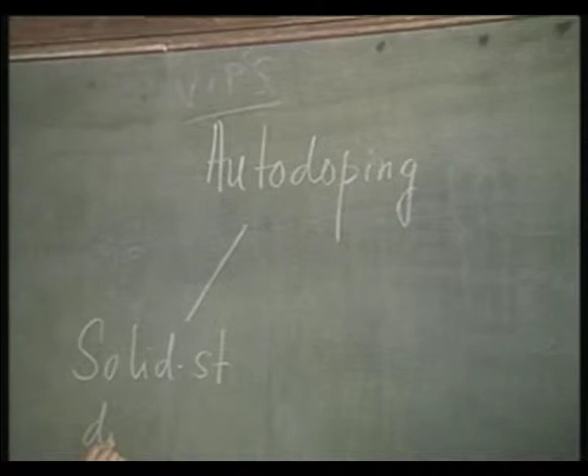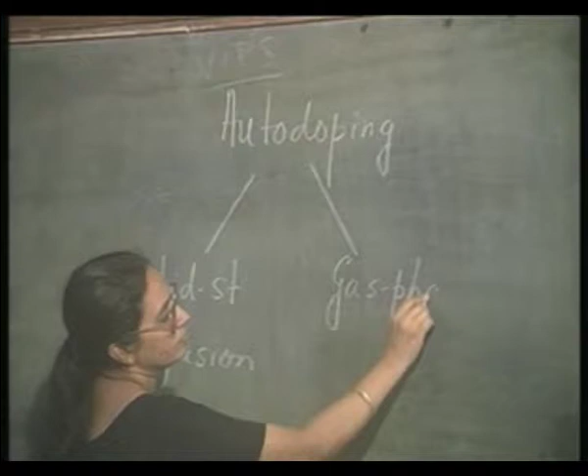Now, there are two reasons for this inadvertent doping or auto doping. One is due to solid state diffusion, and the other is due to gas phase auto doping.

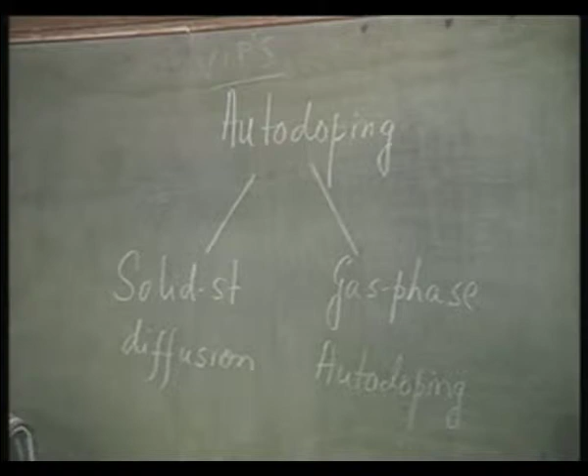What are these two things basically? Before the epitaxial growth takes place, the sample is being treated to high temperature. At that high temperature, it is possible for the dopants already present in the substrate to out diffuse, and this will change the composition of the gas stream. The gas stream composition is controlled depending on the level of doping in the epitaxial layer that you want to grow. You want to put that amount of boron or phosphorus or arsenic along with silicon, but the already present dopants in the substrate layer will out diffuse and modulate the composition of the gas stream, so that when the epitaxial layer is being grown, these dopants which were originally present in the substrate can now get back reintroduced in the epitaxial layer.

Thereby, the doping concentration of the epitaxial layer will change. It will not follow exactly the required doping level. For example, if my substrate is doped p type, and if I want to grow an n type epitaxial layer, near the interface I may have a problem of having first a slightly p type epitaxial layer growing and only then the n type layer growth. We will explore these possibilities later.

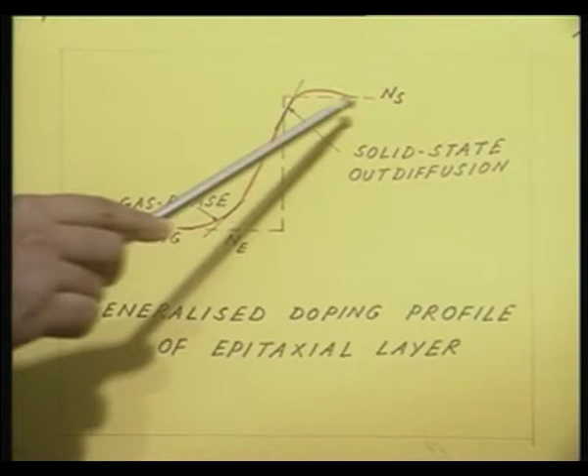Now, in this particular example, I have chosen the epitaxial layer and the substrate to be of the same type. Let us say the epitaxial layer is N type, the substrate region is N plus. So what I have is just this extended transition region, and that actually determines how thin an epitaxial layer I can grow with the proper Ne doping concentration. From this figure it is obvious that up to this point is my transition layer, and only after that do I have the epitaxial region with the proper doping concentration.

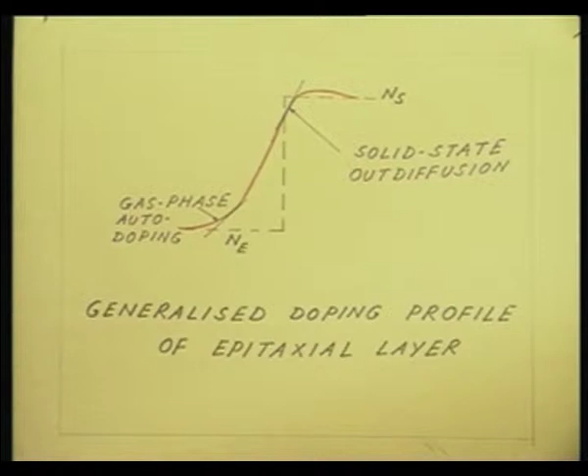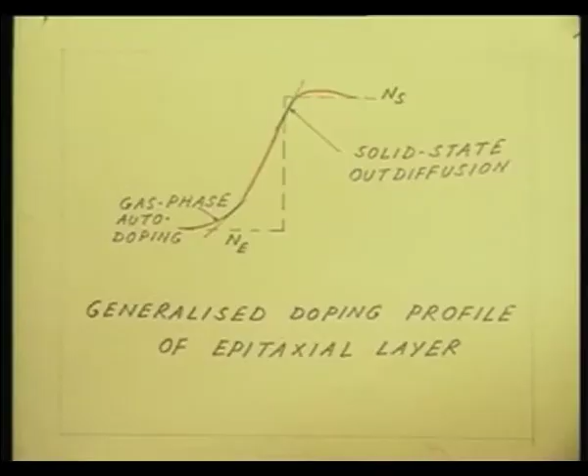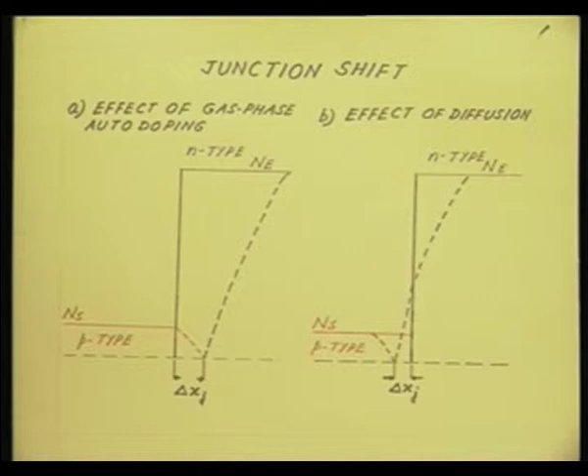The situation can be even more serious if the two regions are of opposite dopant type, that is, if I have a substrate and an epitaxial layer where one is P type and the other is N type. In that case, what is going to happen is called a junction shift. That is, the metallurgical junction and the electrical junction will not be at the same position. By metallurgical junction, what do I mean? Suppose my substrate Ns is P type, and my epitaxial region Ne is N type, then the metallurgical junction is present here, this black line, that is my junction point.

It should be the metallurgical junction exactly at the transition point. But because of the effects of auto doping, the junction can get shifted either way. The figures I have here are not actual figures, they are the results of computer simulation, and in these two figures we have tried to separate out the regions of auto-doping. That is the first figure. If you look at that, this is the effect of gas phase auto-doping.

Let us look at this. What is happening? I have the substrate with a doping concentration Ns, it is a p-type substrate. Gas phase auto-doping is the effect where, before the epitaxial layer growth, when the substrate is being heat treated, some of this p-type dopant escapes, evaporates, and modulates the gas stream. So some of the p-type dopant is escaping and getting reintroduced into the epitaxial region. This red dotted line shows that the p-type dopant is reintroduced in the epitaxial region, and that is why, even though I wanted to grow an n-type epitaxial region, near the junction I find that the junction has actually shifted into the epitaxial region.

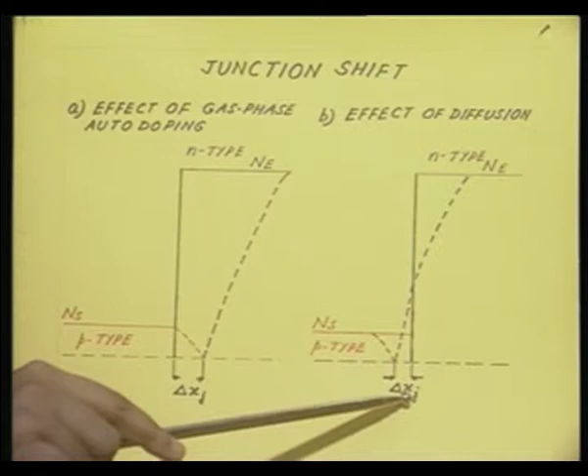P-type dopant is trying to move inside, n-type dopant is also trying to move inside the substrate. So the junction shift is also present here, but notice that the junction has shifted into the substrate, unlike in the previous case. These are, as I said, the results of computer simulation, in which we have tried to isolate one effect and study only that, either gas phase auto-doping or solid state diffusion. In a practical situation, both these effects will be present, so the junction shift will depend upon their relative dominance, which determines which way the junction shifts.

But that is a very important problem, that the electronic junction may be shifted from the metallurgical junction.

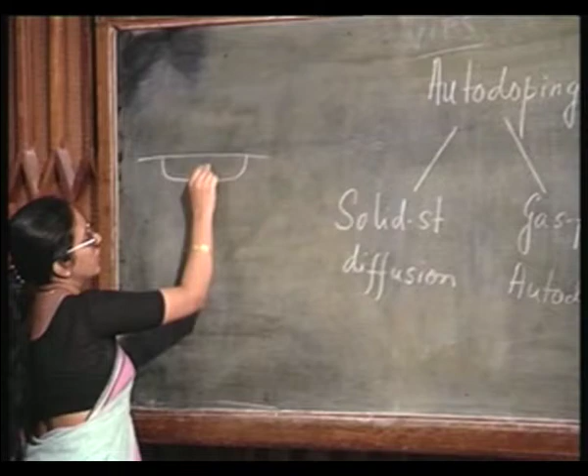So, these are the effects of auto-doping. In this particular case, we have considered only vertical auto-doping, that is the region immediately above the substrate is getting doped. For example, if I have an N plus region and I grow an epitaxial region, then this is the portion where the effect of auto-doping is going to be felt. The shaded region is where the effect of auto-doping is felt.

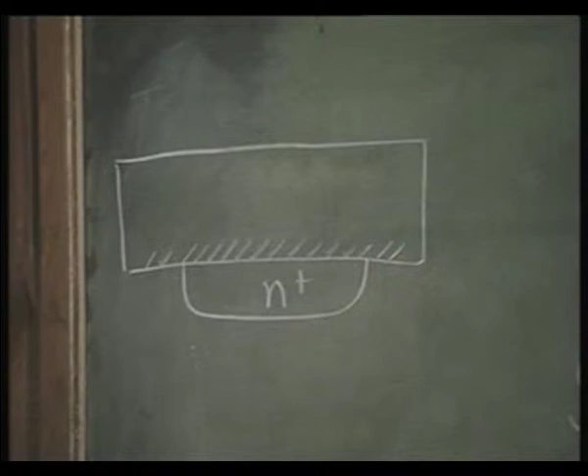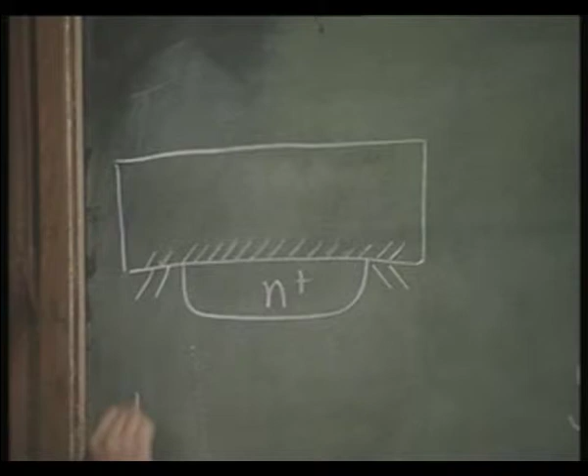This is vertical auto-doping, but actually the effect will also be felt in a region adjacent to the substrate. In fact, all over here the doping concentration will get modulated. This is called lateral autodoping.

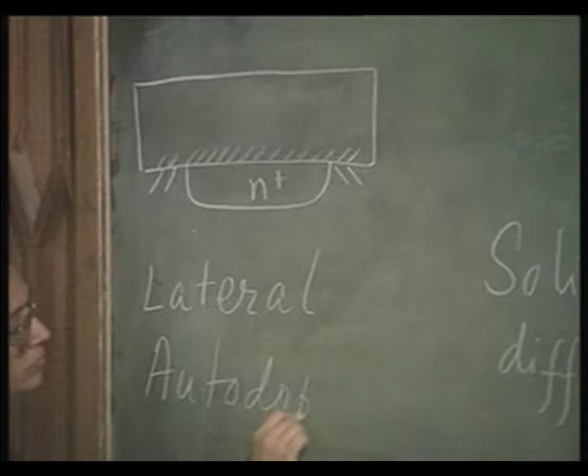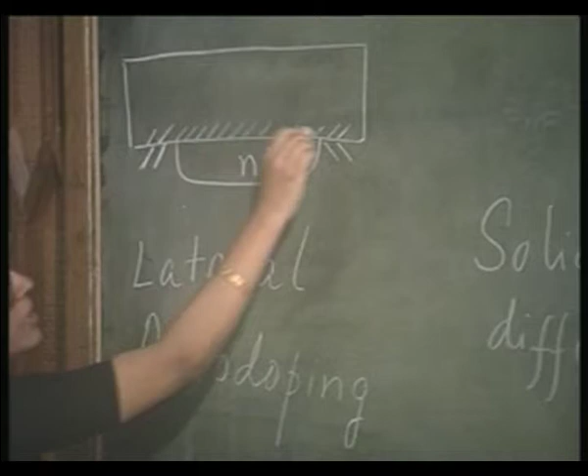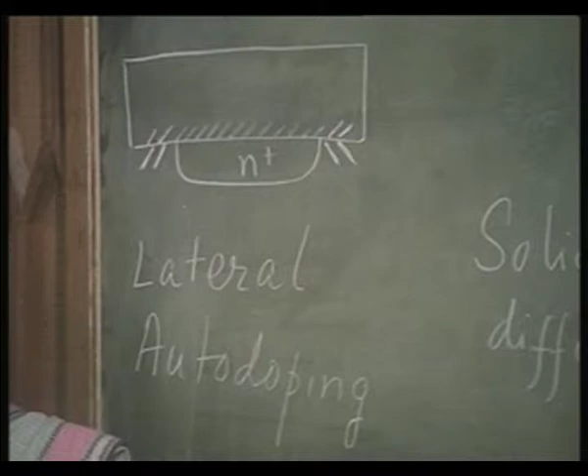Lateral autodoping is almost exclusively due to gas phase autodoping. The solid state out-diffusion plays very little role here; it is almost exclusively the effect of gas phase autodoping. Before the epitaxial layer is grown, when the substrate was being subjected to heat treatment, the dopants have diffused out, and they can be reintroduced all over this place, and from there get reintroduced into the epitaxial region.

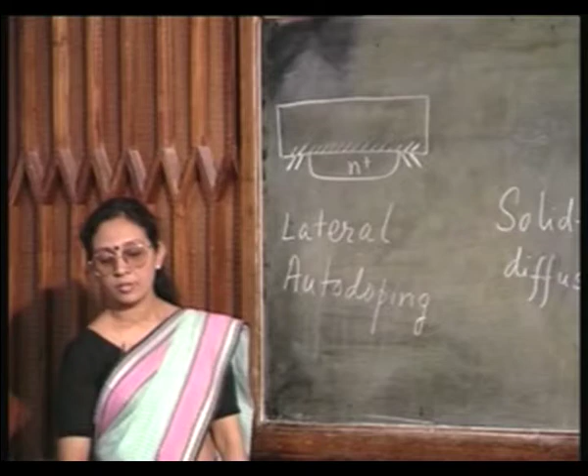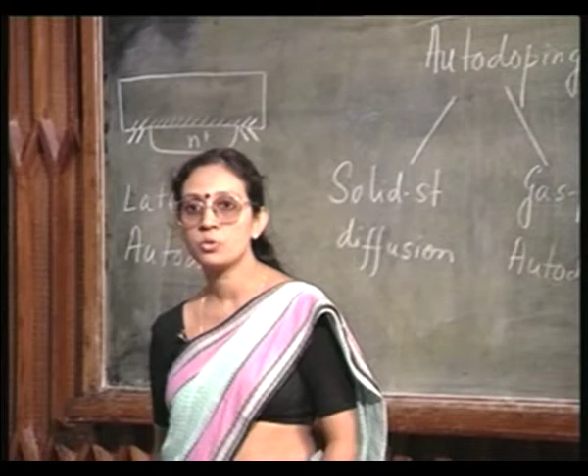So, these are the effects of autodoping, and lateral autodoping is something one should be very careful about, because it may cause an electrical short between two adjacent devices. This is an N plus region, the next N plus region may be further off here, but because of lateral autodoping all the N plus regions can get connected. So, unless you take proper precaution to isolate between the two N plus regions with a boron diffusion or something like that, there is a possibility of getting an electrical short due to lateral autodoping.

Now, there is another interesting aspect associated with epitaxy.

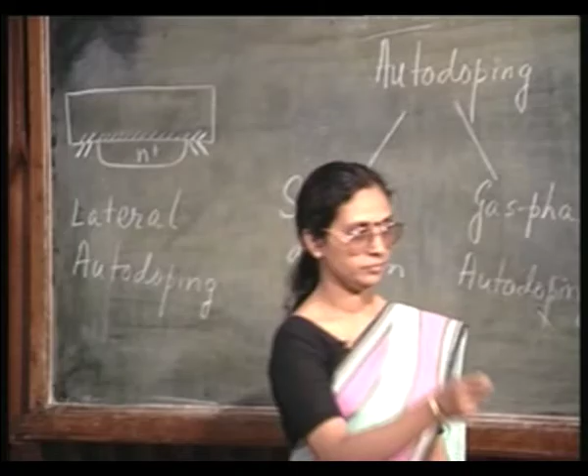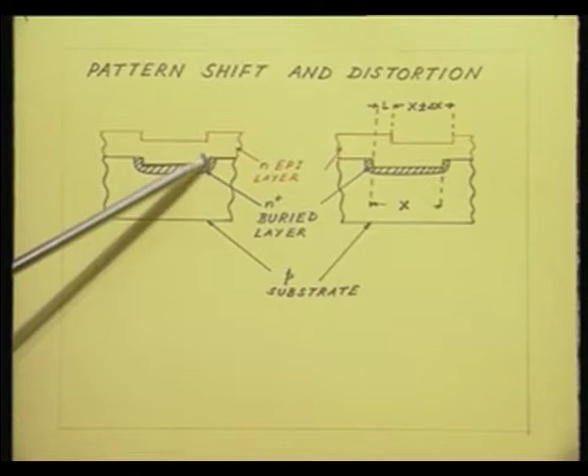Normally I would assume that when there is an indentation on the surface, that is a step on the surface, and if I am growing an epitaxial layer, that same step will be transferred into the epitaxial region also. What I have drawn here is simply the process steps involved in bipolar junction transistor fabrication. I started out with the p type substrate, then made the N plus buried layer, then I stripped the oxide, and in doing so I have created a step here. The step is visible to all of you, you can see the step, right.

So, now if I grow an epitaxial layer, I would expect it to be aligned with this step, so that the epitaxial layer should also be formed like this, because everywhere I expect that, say growing 5 micron from the substrate. So this height should be 5 micron, I should expect it to be properly aligned.

Now, this proper alignment is going to play a very important role in my further processing, because once the epitaxial layer is formed, I have no way of knowing where the underlying buried layer is. So this step is only going to tell me where the underlying buried layer is, so that I can properly put my base mask and emitter mask, so that the transistor is fabricated in this active region and not this way or that way.

So, this is what I want, but unfortunately in most cases what I am going to get is this figure. Here you see that the step is not aligned, it has got shifted.

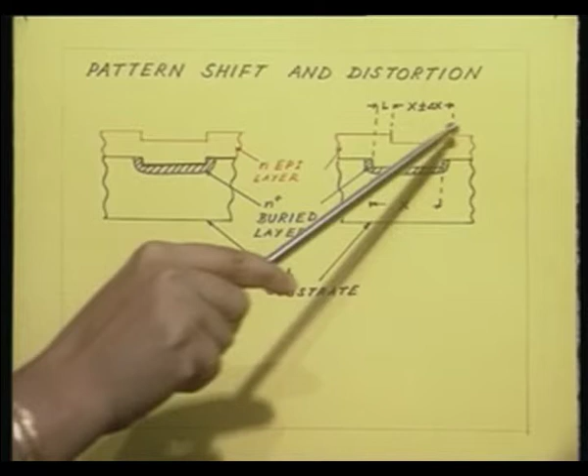Also, the size of the buried layer mask may not be the same. Here I have shown that this was x, the length of the buried layer diffusion, and the length of this step may be x plus or minus delta x. So, the pattern on the substrate may get shifted by an amount L, and it can also get distorted by an amount plus minus delta x.

This is called pattern shift and pattern distortion.

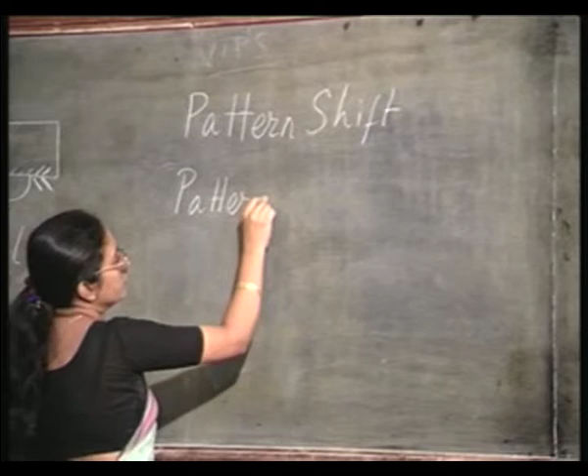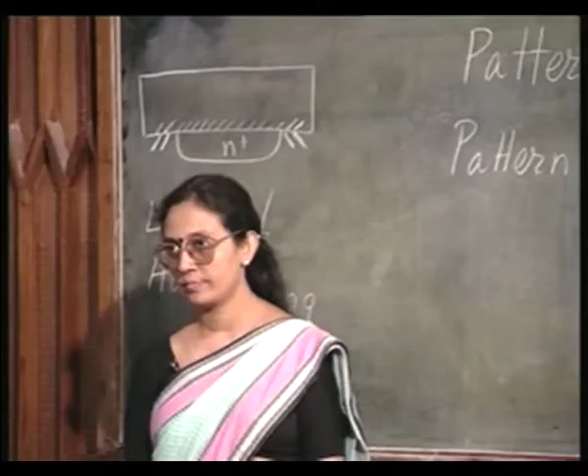Now, the question is, why should this pattern shift and distortion take place? It takes place because, as you already know, crystal growth is extremely dependent on crystal orientation. What is epitaxy after all? It is growth of a crystalline layer.

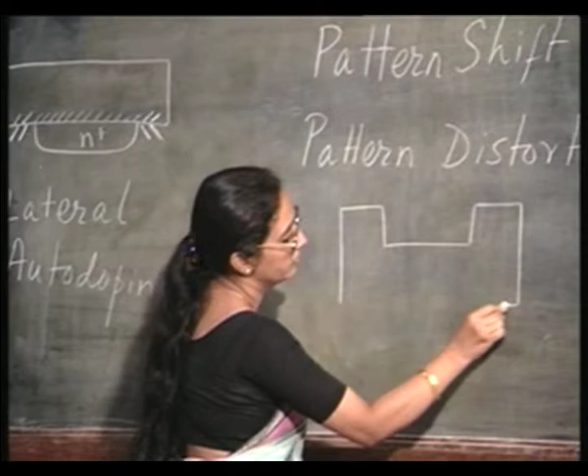Whenever there is a step on the surface, you are exposing a number of crystal planes at that step. The surface may be 100 or 111 or whatever, but whenever there is a step, a number of crystal planes are going to be exposed.

When epitaxial growth is taking place, it is taking place anisotropically, that is, the growth rate depends on crystal orientation. That is why you do not have uniform growth rate. If you had uniform growth rate, the step would get translated into the epitaxial layer, no problem. But because this growth rate is anisotropic, you get all these problems of pattern shifting and pattern distortion.

How does one minimize this pattern shift? Minimizing this pattern shift and distortion is quite crucial, because it will affect my further processing and determine the alignment of my further processing steps. So, a lot of research has gone into connecting pattern shift and distortion with the epitaxial growth parameters, and these are some of the findings.

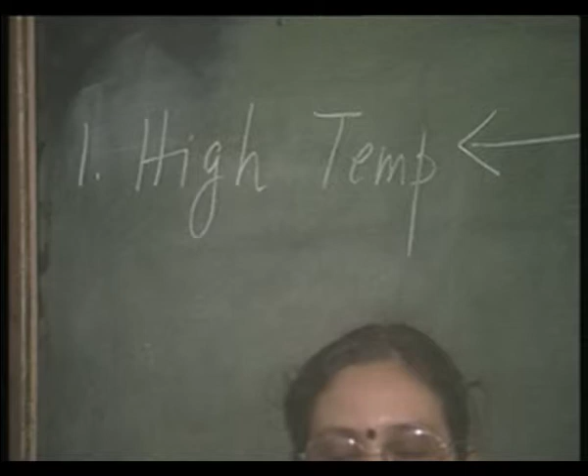Also, if you operate in the region of low growth rate, remember last class we showed a graph of silicon tetrachloride concentration. As you increase the concentration of silicon tetrachloride, the growth rate increases, and if the growth rate is too high, you don't want that, because you get a polycrystalline layer. This follows as a corollary: if you have reduced growth rate, the crystal quality and layer quality are better, so the growth tends to be isotropic. The second point is you should operate in a low growth rate region.

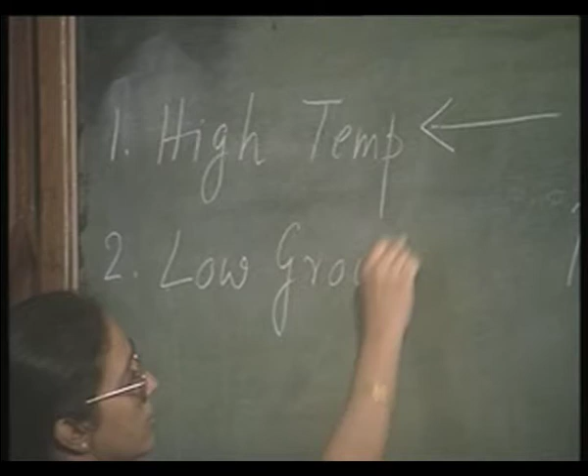It is also seen that the more chlorine you have, the more pattern shift there is. Again, it can be related: the more chlorine you have, the higher the growth rate tends to be, therefore anisotropy tends to be more. So reduce the amount of chlorine and you will have less problem of pattern shift.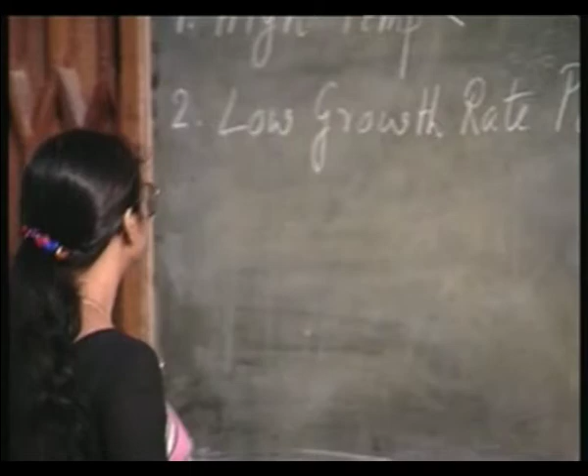A corollary of this third point is that with lower pressure the pattern shift will be less. If you have lower pressure, you can vent out the chlorine or the HCl faster, and therefore the pattern shift will be less.

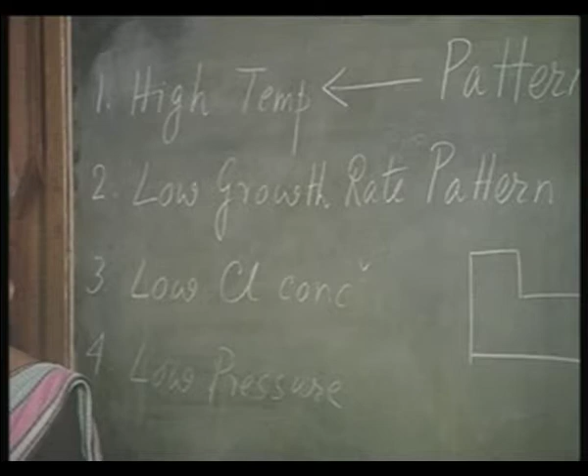In addition, how the substrate is oriented during epitaxial growth also plays a major role. If you have a 100 substrate, keep it perfectly oriented to its crystal plane, so the gas flow comes perfectly along the sample surface. On the other hand, if you have a 111 wafer, misorient it slightly, by 2 to 4 degrees. That has been seen to minimize the pattern shift problem.

So this is universally done: if you have 100 samples, keep them perfectly oriented; if you have 111 samples, misorient by a couple of degrees, 2 to 4 degrees, to minimize the pattern shift. Let me mention one thing as a corollary of point number 3.

Remember, silicon epitaxy can be carried out by two routes: the chlorosilane route and the silane route. As a corollary of point 3, if you use the silane route, the problem of pattern shift should be minimized, very low, because it is absolutely free of chlorine. But even though silane does not give you a problem of pattern shift, the pattern distortion problem is still present there.

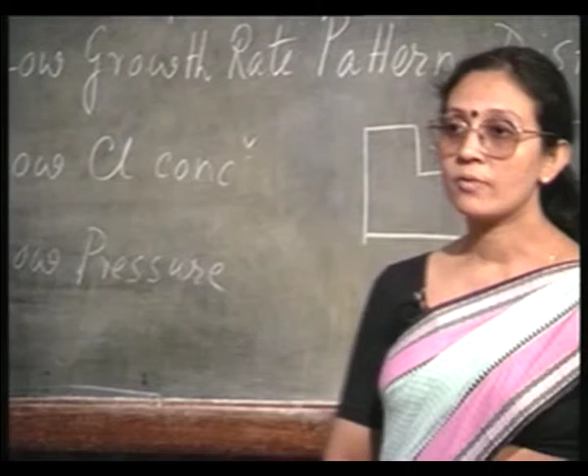So one aspect is that we have to minimize pattern shift by carefully controlling process parameters. The other aspect is, in spite of all these precautions, if you still have pattern shift and pattern distortion, your subsequent masking steps should take care of this defect. You must identify how much pattern shift there will be, so even if the step gets shifted by an amount L in one direction, your next mask should actually be shifted by minus L, in order to take care of the alignment problem.

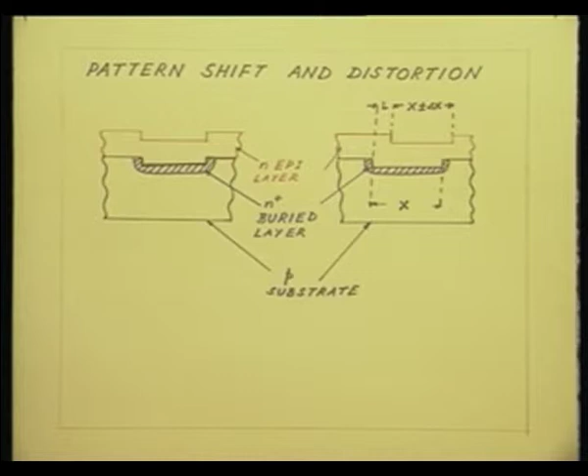Now that we have grown an epitaxial layer, the next point is how good is its crystal quality. Let me tell you something: the epitaxial layer is only as good as the bulk crystal is, because you are growing something on top of an already existing layer, and as I said, the term epitaxy itself means arranged upon. The crystalline quality of the epitaxial layer comes about because of the underlying crystalline symmetry of the bulk layer. So unless the bulk layer shows very good crystalline symmetry, you cannot expect anything to be arranged upon that. So the quality of an epitaxial layer is critically dependent on the quality of the bulk layer.

It is only as good as the bulk layer, and very often the quality is really inferior to the bulk crystal. That is because the bulk crystal defects will get translated into the epitaxial layer. During the epitaxy, some additional defects will come into the picture. Therefore, the final crystal quality is likely to be inferior to the bulk crystal quality.

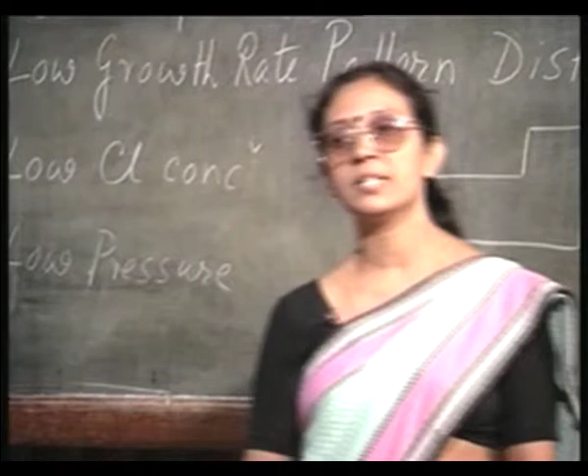And finally, if there is a bulk stacking fault which is crossing the epitaxial region, then that will grow into the epitaxial region and form a layer of stacking fault. Of all these defects, the most important one is the stacking fault. This is the most commonly present, the most important type of defect associated with the epitaxial layer, and they can be examined by etching the epitaxial surface in a selective etchant.

After the growth of the epitaxial region, the usual practice is, along with your processing wafers, you also put a dummy wafer for this characterization testing in the epitaxial reactor. So on the dummy wafer you carry out some selective etching. If you carry out the selective etching, then these stacking faults can be viewed as small pits on the surface. The etching will take place in a preferential manner around these stacking faults, and you will see them as pits on the surface.

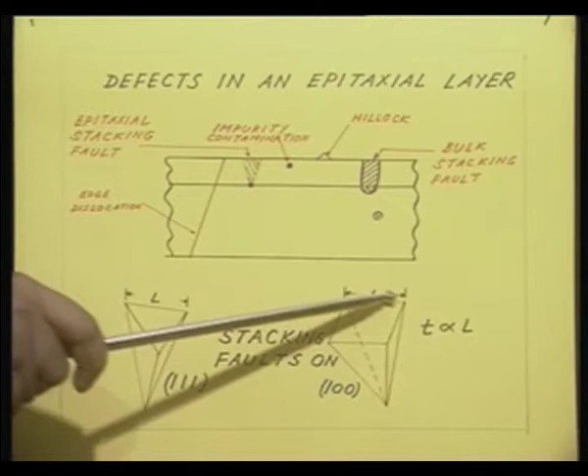In both cases this is true. Here the side of the triangle I am calling L, and here I am calling the side of the square or rectangle L. This will give you a good idea of the epitaxial layer thickness without having to resort to other techniques - a simple, ready to use way.

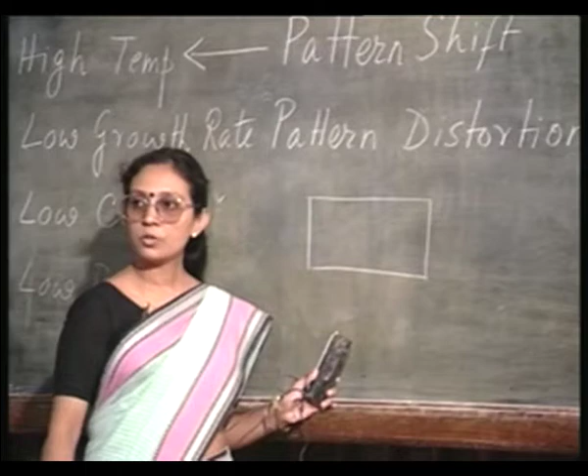So far we have been talking about vapor phase epitaxy in general, and vapor phase epitaxy of silicon in particular. I could continue on this topic for some more time, like the possibility of selective epitaxy. Selective epitaxy is something like this: suppose you have a substrate, you want to grow an epitaxial layer, but you do not want to grow it all over the place, you only want to grow it somewhere here. So this is called selective epitaxy.

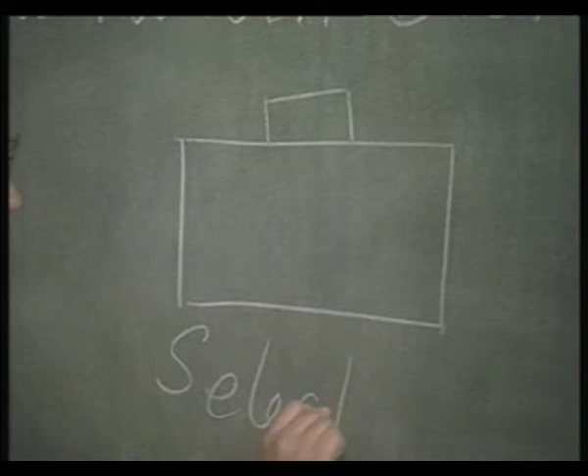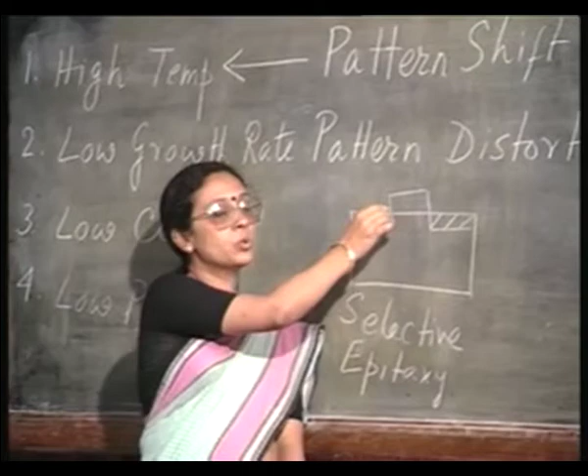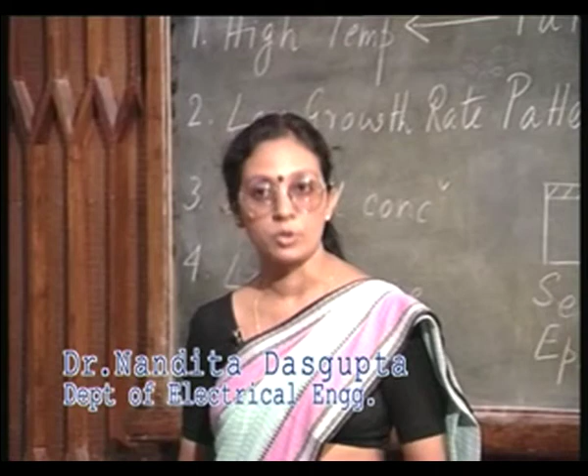This is usually done by covering the regions where you do not want epitaxy to take place with silicon dioxide, or sometimes polycrystalline silicon, and then carrying out the epitaxial process, controlling the temperature and growth rate, so that epitaxial growth only takes place on the exposed silicon. It is quite simple to understand: suppose the surface is covered with oxide, with some windows where the underlying silicon is present. Remember, the chlorosilane reaction is actually surface catalyzed, so only where it comes in contact with the silicon surface will epitaxial growth take place.

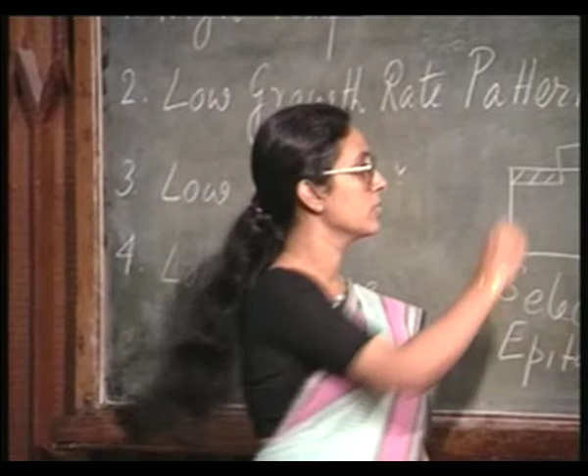Similarly, if you cover it with polycrystalline silicon, it is also quite simple to achieve, because on polycrystalline the growth will not be epitaxial, but will tend to be amorphous or polycrystalline. So selective epitaxy is quite an attractive technique, because you can have islands of silicon epitaxial region, and the isolation between devices is going to be quite simple. You have one transistor here, another transistor here, and they are automatically isolated - they can be made automatically isolated. But in principle, they are all the same; they all come under the category of vapor phase epitaxy.

There is another technique of growing thin crystalline layers, which has become very important nowadays, and that is called molecular beam epitaxy.